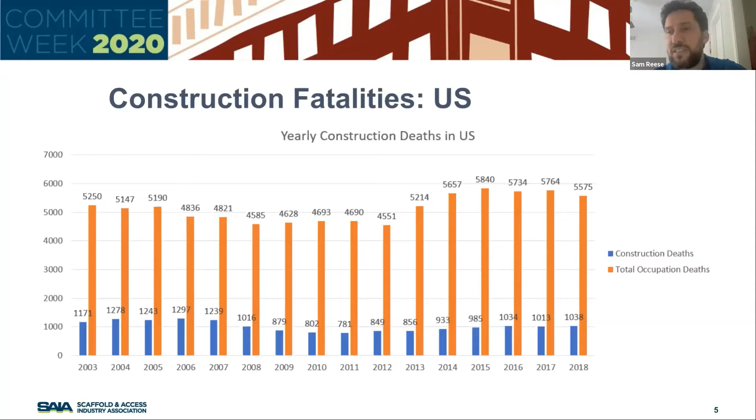In order to compare data between countries, it's important to look at a ratio, and the more common ratio is deaths per 100,000 employees in an industry. The US in 2018 had around 16 fatalities per 100,000 employees. The construction industry in the US is estimated to have 7 million employees. So 7 million employees over 100,000 times our rating at 16 adds up to around 1,000, which correlates to the number we saw before.

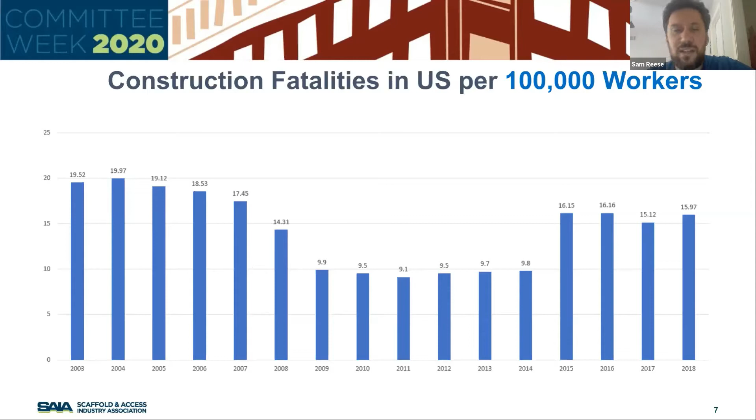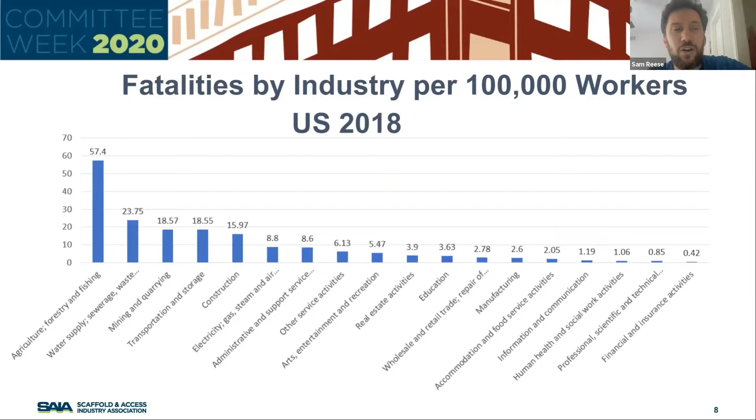How does that ratio for construction compare with other industries? We saw the number of deaths in construction were higher than other industries, but when you look at the ratio, we're about the 5th most deadly industry, with number 1 being agricultural, forestry, and fishing. I actually worked in Alaska back in 2005, where forestry, if you take it out by itself, I remember the number being around 100 per 100,000. So that number is a bit bigger if you just categorize forestry or fishing separately. But as you can see, construction is 5th most dangerous as a ratio of workers to fatalities.

So the question was, now that we know the US's fatality rating and how we're doing on a yearly basis, which has been fairly consistent with the exception of a dip after the economic crisis, we look to the International Labor Organization. It's an organization established 100 years ago. It became a UN agency in 1946. Their stated goal is to bring together governments, employers, and workers of 187 member states to set labor standards, develop policies, and devise programs promoting decent work for all women and men.

The information we got was from the ILO Stat website, which includes a number of statistics that they provide, and that's where we got the fatality ratings by country.

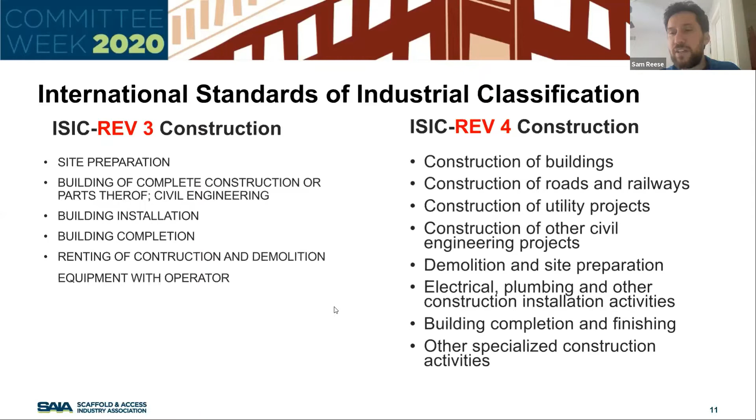So how does this affect the data? Here's an example: the UK has been reporting their construction fatalities. From 2000 to 2006, they used revision 3 of the ISIC. From 2009 to 2015, they used revision 4. You can clearly see a trend—revision 3, being a broader category, had higher fatality ratings, and there's a trend downward as the revisions became more specific in the 4th edition.

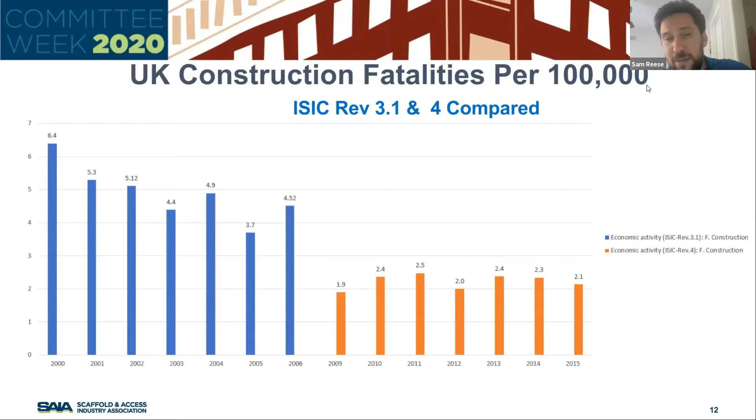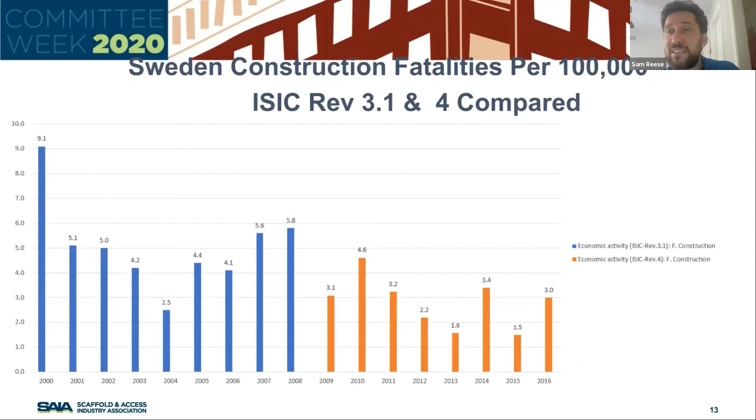Another example with a lot of data between both revisions to compare is Sweden. There are examples, like Sweden's 2004, where it looks like a low fatality rating, but in general you can see the trend continues to show a smaller rating between the two revisions, and it's attributed to the category change, not necessarily an improvement in conditions.

A third example of these differences, which is problematic, is the Russian Federation. Between 2007 and 2016, their fatality ratings were up as high as 34, and at best 18 fatalities per 100,000. Then, when they changed to the new revisions, it suddenly becomes 0.18 and 0.17, which is hard to believe. More likely, the data reflects an issue with the changes in categorization rather than a real improvement.

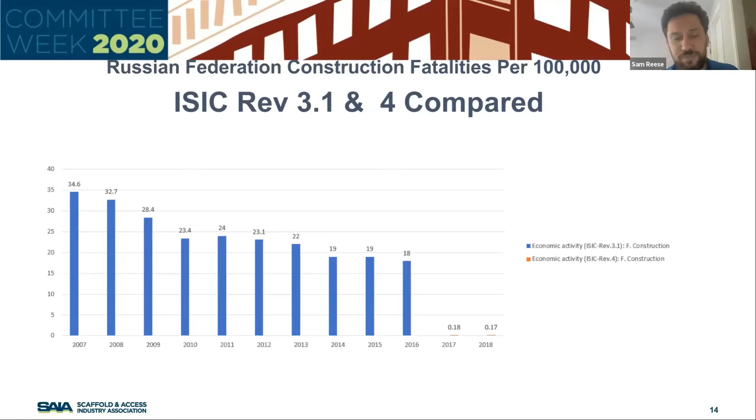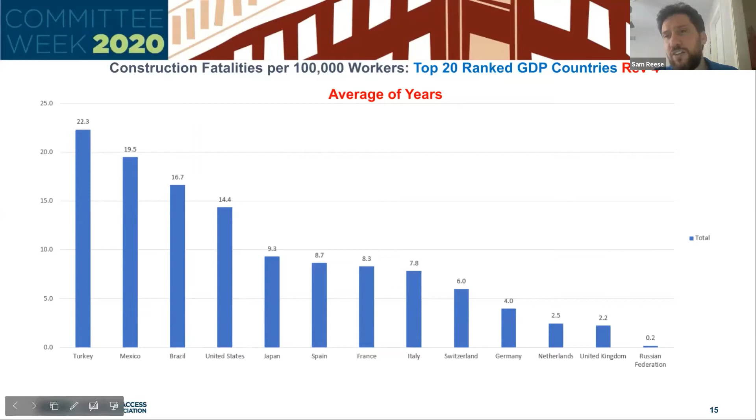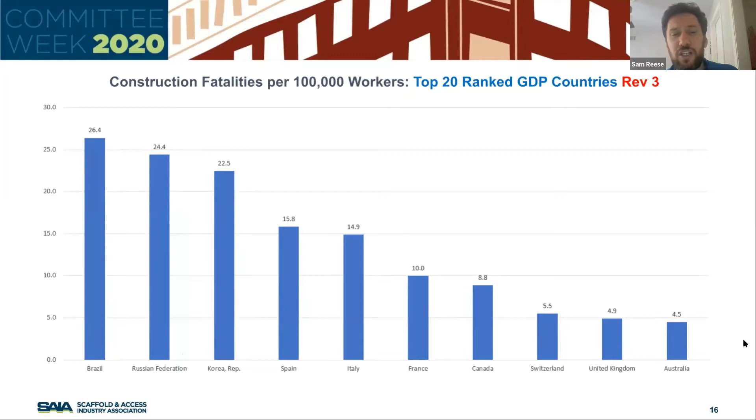This right here is a chart showing countries that use the 3rd revision. The US is not in there because they've been using the 4th revision, but as you can see, a lot of the European countries have better ratings. You see Australia in there with the best rating under revision 3, and then you can see Brazil, Russia, Korea with a worse rating.

I mean, although there are problems with the comparison and the data in general, I think it lends a pretty good assessment that the US has room to learn from some of the other countries that have a much better fatality rating. And I'll let Andrew talk about some of the construction associations that we've researched.

Thanks, Sam. What we did was we took the numbers from the data sets we were looking at and tried to find a place to anchor some data. We found there's two associations in the UK that do look into this. One, NASC, publishes data to give us some idea from an internal reporting perspective where they stand, and there's the Scaffolding Association as a whole. We tried to extrapolate our findings from these two organizations to see how the scaffolding industry as a whole is generating that reporting.

If we move on, just to give some background about the two organizations, starting with NASC: NASC was founded in 1945 and is actually the oldest scaffolding trade association in the UK. The interesting thing about NASC is they are a peer audited organization, and the membership has to meet and maintain specific standards in order to become a member and maintain ongoing membership.

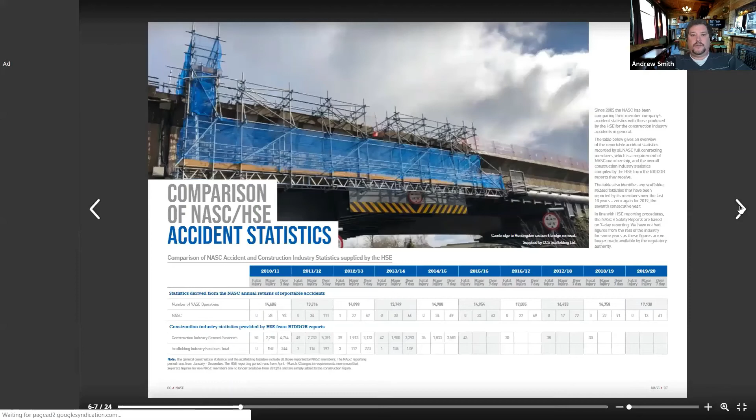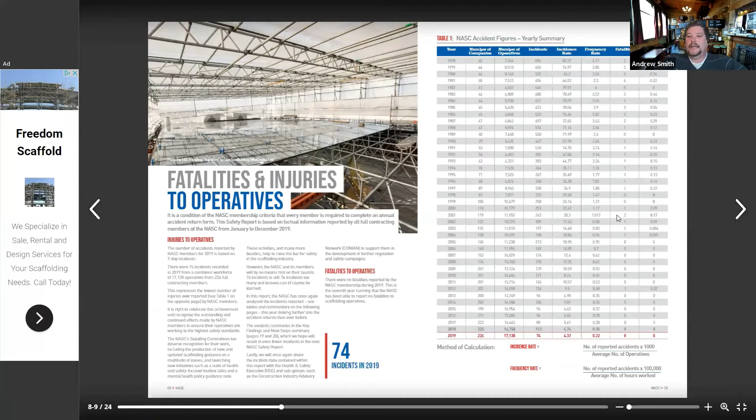Sam's sharing a touch of information here just to give you an idea. You can see there's a lot of data tables in there. No doubt this is a piece put together to show their value as a trade association or confederation, but the data they place here is self-reported. They show that within their organization, for 7 years now, they've not had a fatality, and a significant number—in fact there were just 74 incidents reported in 2019. Good data, and when the presentation goes out you'll be able to take a look if there's interest.